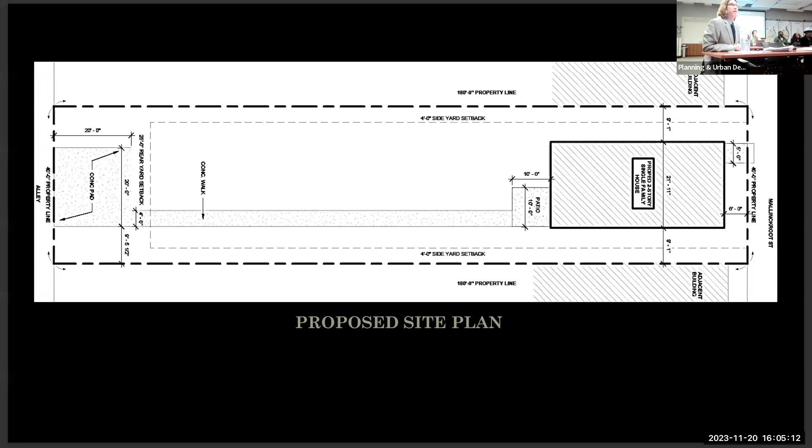Next, and this is the actual building. We worked with Habitat on this. This is a good design where we got to at this point. It started pretty rough, they worked with us and the neighborhood, and so we are satisfied with this design.

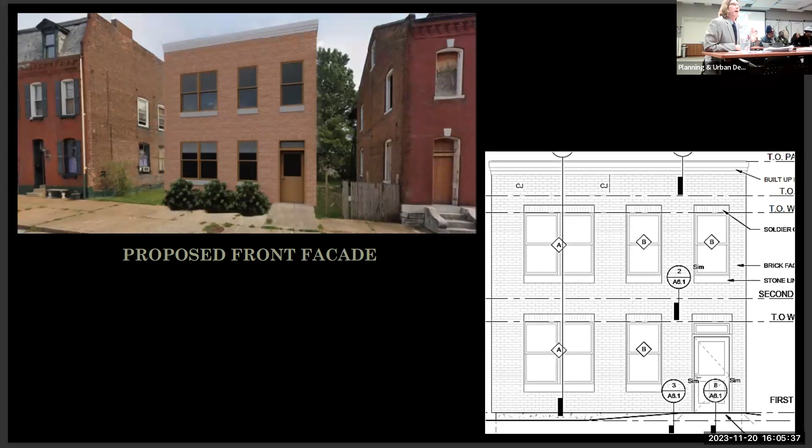Brick front, the windows and doors will line up on the first floor and the second floor for the most part. The brick returns will go down the sides about 10 feet, which will be at least the distance to the next buildings over.

Next, this is just showing the side elevations and the rear. Okay, so overall it complies with all the aspects we feel of the code. The fenestration is good, the material, the way it sets on the property. It has neighborhood support, and overall we recommend approval.

Have any questions from me on the design? Oh, I want to note one thing. You'll see on the elevation on the right down below, we've asked that they do an exposed foundation plinth that resembles what's to the left, and they're going to do that as well. So everything we've asked for them to do, they have done.

So any questions? Are they allowed to have tinted windows in that district? They don't really say otherwise, but if it's something you'd like to address, we can. It doesn't say they can't. It talks about the materials of the windows themselves, but it doesn't address the glass.

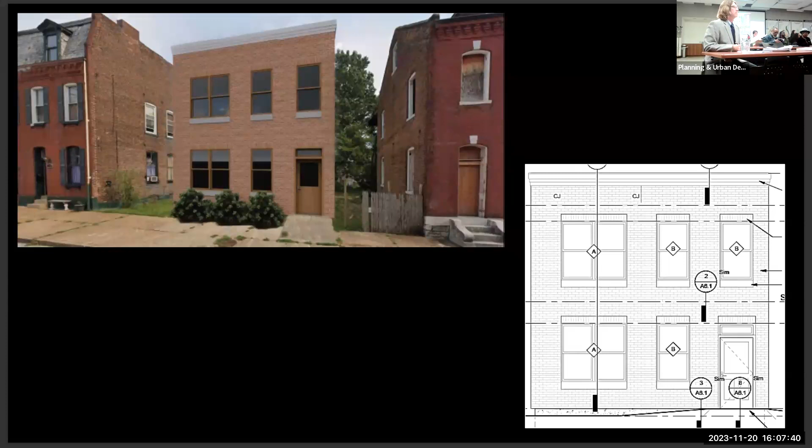We obviously have support of the Alderman. She is here in support of the project as well. Any questions on it? Alderman, you want to say something? Sums it up.

Questions? Could I say one thing?

Questions on the motion to approve the gate just mentioned? I move that the Board of Public Service approve the proposed gates as well as the additional gate mentioned. Second? Second. Any discussion? Hearing none, I'll call a roll.

Commissioner Allen, you vote yes or no? Yes. Commissioner Halligan, yes or no? Yes. Commissioner Hamilton, yes or no? Yes. Commissioner Khalid, yes or no? Yes. Alderman Ryan, yes or no? Yes. Commissioner, yes. And Alderman? Yeah. Chair abstains on this vote. There are 6 yeses, 1 abstention. The motion carries. Follows the agenda item C.

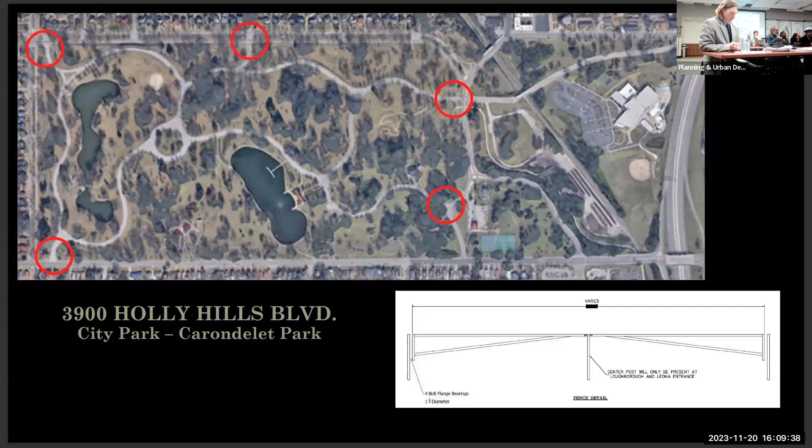Any questions? Okay, this is agenda item C. Commissioner Hamilton, you got a motion?

Yes, I move that the Preservation Board recommend to the Board of Public Service the approval of the permit for the signs. Do you want to add any extra signs to it? We could add more if you'd like. I think the budget will probably prohibit that, but no.

Motion is on hold for you, in a second. I'm going to call it. Commissioner Allen, yes or no? Yes. Commissioner Hamilton, yes or no? Yes. Commissioner Khalid, yes or no? Alderman Ryan, yes or no? Yes. Commissioner Richardson, yes or no? Yes. Commissioner Robinson, yes or no? I abstain. That was a yes. Chair abstains on this. There are 7 yeses, 1 abstention. The motion carries.

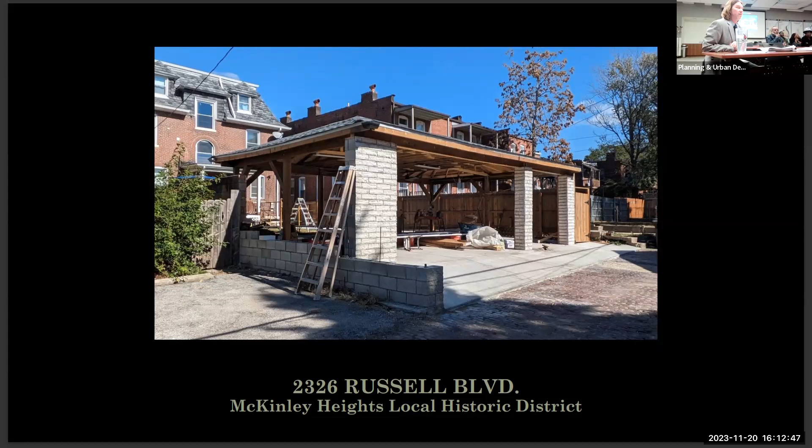So let's go through some context real quick. Here we are just to the east of Jefferson. Alley context, it's a typical alley, not street visible at all. In McKinley Heights, this carport complies completely except for the use of stone. They allow for brick and siding, but any kind of stone, artificial or natural, is not an allowable material in the ordinance right now.

The owners did so to match their house — this is their house on the right. So when working with their contractor, this is what they spec'd out to match their property. We explained that we cannot accept that and would require board approval. So this is where we are. They say that they want to do this. This is how they want to proceed, and I'll let them go into more detail on that.

We have not heard an official statement from McKinley Heights. Their board is going through a bit of a change in staff, so we will have no official opinion from the neighborhood for this item. But given that, staff still recommends that the board uphold the effective denial, as the use of stone is not an allowable material for garages in McKinley Heights.

Any questions for me? Do you know if these piers are masonry? They're actually like a cinder block. Okay, that's a real stone. It's an artificial stone, a stone veneer. Okay, but it's actual stone. Yeah, it's like a cultured stone. Wait, it's artificial. I may be wrong by terminology, I apologize.

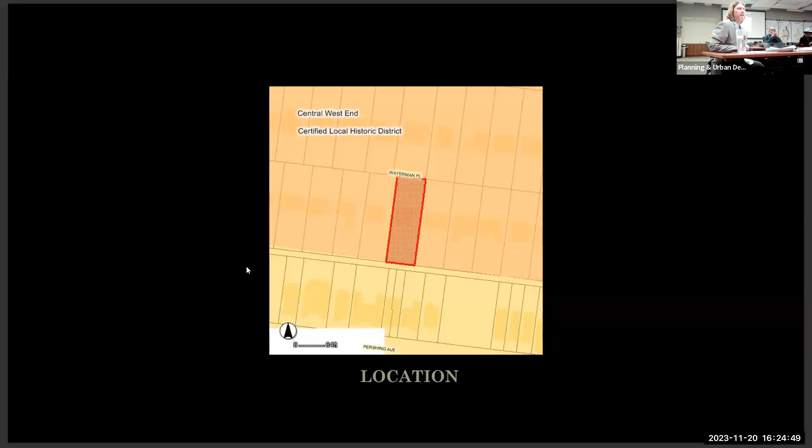Next, okay, so the project entails this: on the east side of the building there used to be a deck that was single story, well, 2 decks, and they were not connected. The second floor deck is still in place, although it's in really rough shape. There used to be a first floor deck that has now been removed some time ago. The new plan calls for restoring the first floor deck, replacing the second floor deck, and connecting the two.

The proposal calls for rebuilding the decks, but having a corner post that connects the two instead of doing a bracketed system at the second floor. This is being done essentially to prevent some over-engineering. The manager for the project is here, she can speak further on that. Essentially, this was deemed to be the best solution construction-wise to add the post.

The issue is, since this is Central West End, a street-visible item, it needs to be replicated. So the post is obviously a new item. The use of Trex decking, which will be on the floor and the sides, is not original material. The handrail, although pretty close, is not exact to what was there originally. So we have a few items that do not replicate the original.

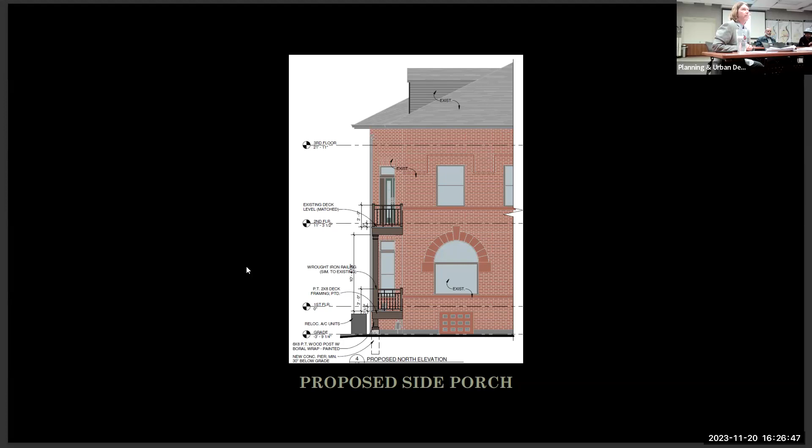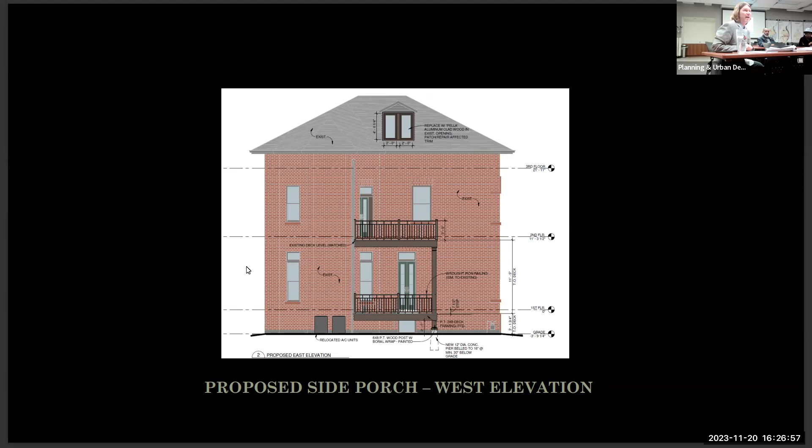So staff could not approve it at our level. We do not have any comment from Central West End on this item or from elected officials. So again, no comment from the neighborhood or the elected official. This is the side view of the porch, and a section detail as well. Next, okay.

The ordinance requires that items be replicated. Deviations include the post, the handrails, and the materials. The first floor porch is in roughly the same configuration and shape as the original. Given these deviations from the design, staff recommends the board uphold the director's denial.

How old is the existing balcony, in your opinion? It looks like it might be original, right? We think it's original. There are some ghost lines on the first floor. It definitely looks older, given the way it's attached to the building. Yeah, it's most likely original, or if not, I think it's historic.

I believe so, yes. The ghost lines you see on the first floor show a deck going all the way across, as they want to build. Is that true? That is correct. Sorry, I can't see it, it's kind of washed out here. I apologize. Historically, we wouldn't have seen brackets go out to hold up a first floor deck, so there probably was a post at that corner. Well, actually, there are some — from the ghost lines, it actually looks like it was bracketed.

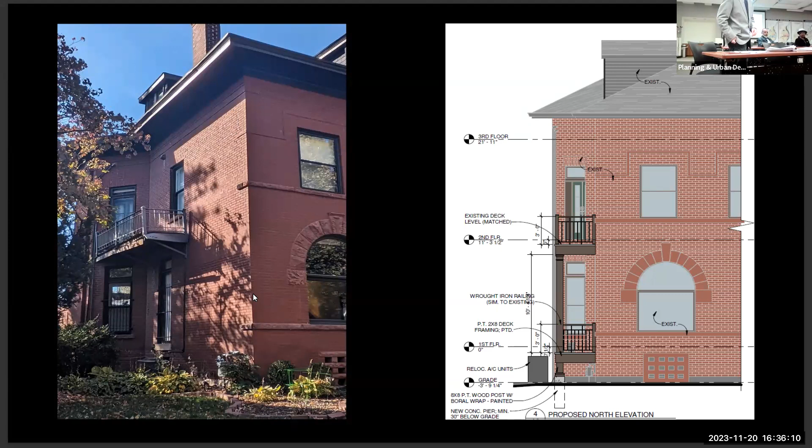Okay, commissioners. Commissioner Abbott. Well, here we are again. This is a horizontal board fence. Sure is. Do I hear a motion? Should I enter my stuff? Okay, 5 minutes staff, tell the truth. Enabling ordinance 64689 as amended by 64925, Benton Park, ordinance 67175 - presentation of my PowerPoint and my firstborn child.

Is it already installed? Okay, so quick background: they began construction without a permit. They were about halfway through when we got the phone call. I went out and placed a stop work order. The owners called me immediately - they thought their guy got a permit as well. I talked to their contractor, and he didn't understand. He doesn't work in the city very often, so he was confused.

I set him straight - the contractor, not the owners. They've been great to work with. They applied right away, so they're about halfway done. It is in Benton Park, next door to one that we did last month. And Benton Park is in support of the homeowners. They are, they are. Okay, great.

I move that we overturn the director's denial and approve the horizontal board fence. Any discussion? None. I'll call the roll. Commissioner Allen, yes or no? Yes. Commissioner Howard, yes or no? Yes. Commissioner Hamilton, yes or no? Commissioner Green, yes or no? Yes. Commissioner Ryan, yes or no? Yes. Commissioner Richardson, yes or no? Yes. Commissioner Robinson, yes or no? Yes. There are seven yeses, one abstention, your appeal is upheld.